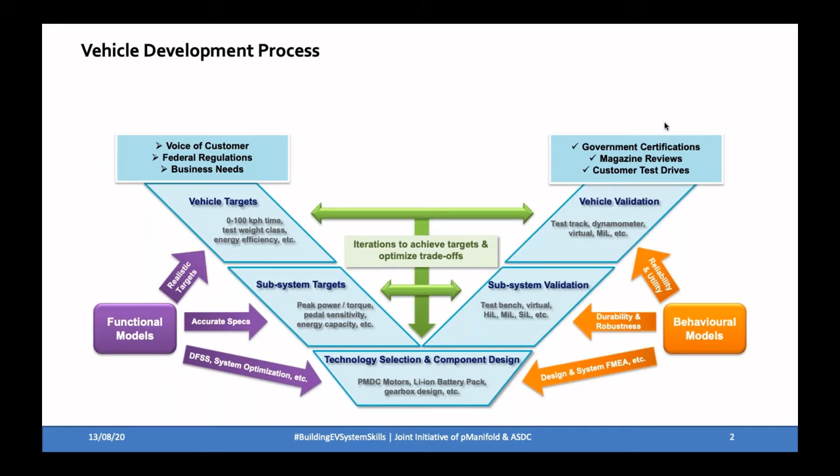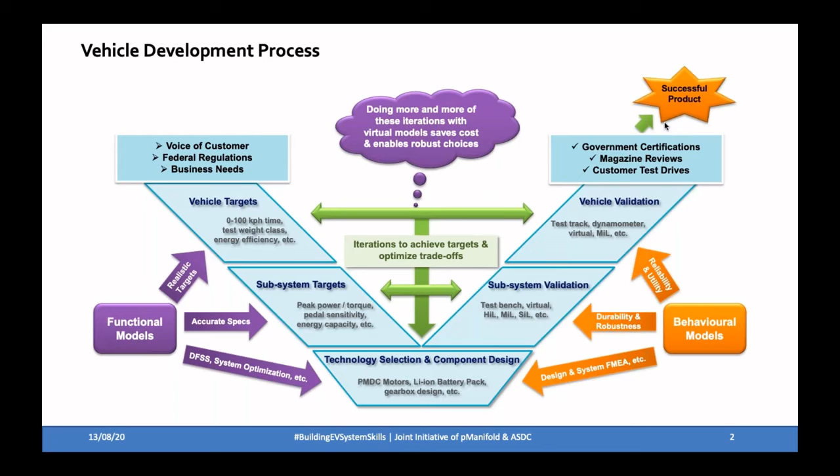And now you can change different inputs, right? You can test your vehicle under different road and driving conditions, under different loading conditions. You can do different driving cycles of the road conditions. You can do different weather patterns to understand how it is impacting your battery performance and what trade-offs there are with the range. So all this combination of tests you will yourself be able to do towards the end of this course.

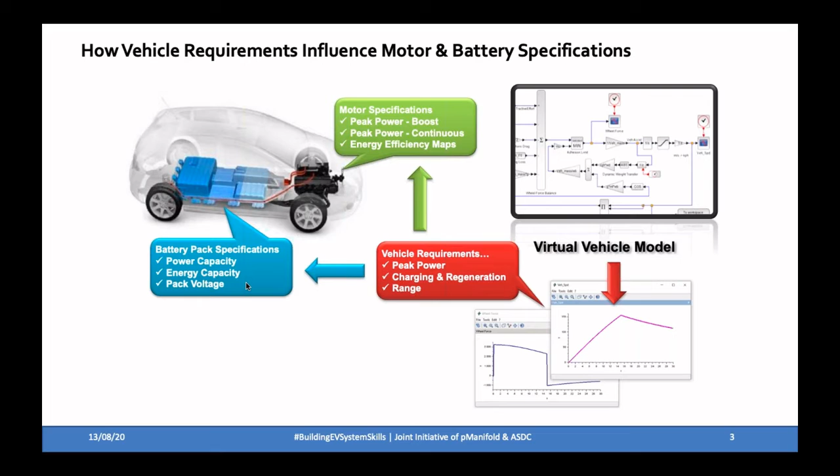Let's take an example of this. Here we are talking of starting with the vehicle requirements, right? Like what an end user wants. He wants good peak power, so he can accelerate the vehicle faster when required. He wants faster charging, and he wants a good range. So these are the typical requirements of a user. And how these requirements translate into motor requirements and specifications, and how they translate to battery pack specifications, is what this course will allow us to ask the right questions about, then build basic models, understand the trade-offs, make appropriate selections, and then integrate all of these things to really test the overall EV performance. Let's understand it a little better with one more example.

Also, to tell you, there are two instructors for this program. The primary instructor will be my colleague and senior partner Vikrant Vaidya. He is unable to make time today. Vikrant has a 20-year background in automotive systems engineering, doing modeling primarily on cars, and he has worked globally with different organizations, on different hybrids and pure electric vehicles. He has designed this particular course understanding the needs of the engineer. He has also been a recruiter for the last 15 years from top colleges globally and in India, and he understands the gaps coming from fresh students, and even the gaps existing with current automotive engineers. So keeping all those practicalities in mind, this course has been designed.

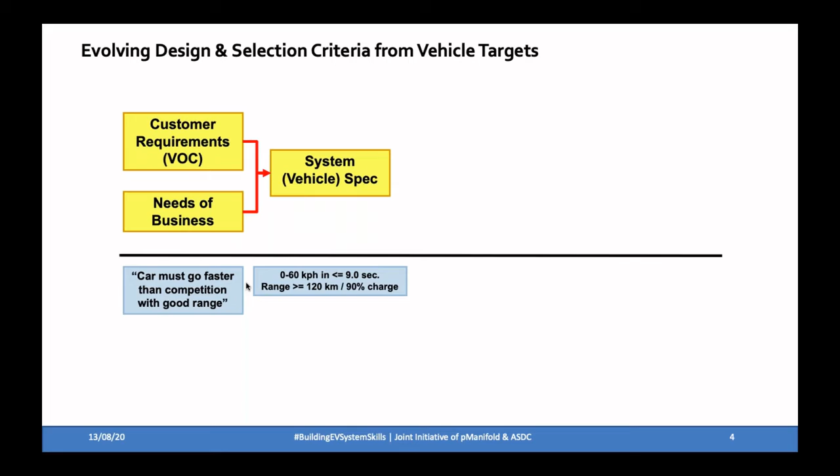So in this particular example, typical requirements start from the customer point of view, and typically a customer, as I said, wants a car going faster, faster than the competition, and with good range, right? You usually start with this definition, and then you further define and quantify it through benchmarks. Let's say you want 0 to 60 kilometers per hour in 9 seconds, and you want a range minimum of 120 kilometers with 10% DOD and 90% charge. So this is the vehicle spec at a very top level that you want your car to be delivering. And then you again benchmark: is there any change that you want?

Like you want to be best in the target segment, better than the target segments. How have you benchmarked? What cost point? What segment are you really targeting with your vehicle? All those choices will really help you make a call on where you want to position your model.

And with this specification, then you need to go into the subsystem specs, right? So the second question will come like, what will be your wheel torque? For you to deliver this speed and range, what would be your wheel torque? What battery capacity should you be looking at?

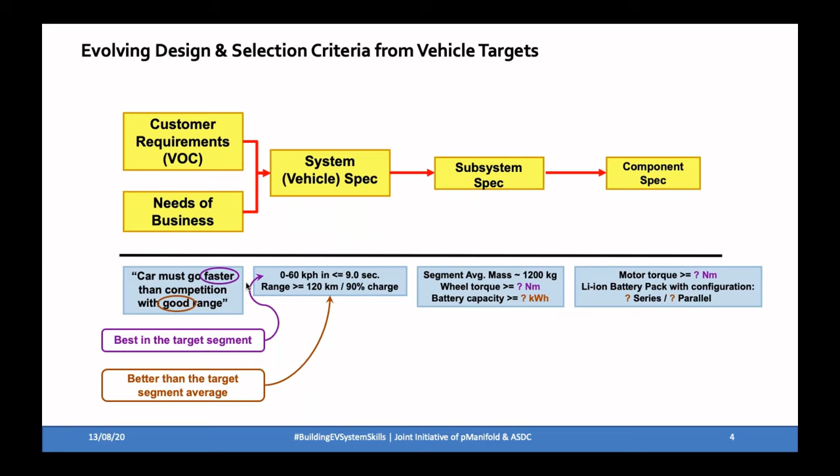And then when you answer that question, the second level further will go into detailing of the motor torques, the gear ratio, how you really fit your pack in the space you have, what kind of series and parallel combinations you will do. So this is one example of how from customer specs we go to the end mile of the component specs. Let's go a little deeper into what you will start learning during this course.

So don't get scared with this model. We will actually help you to really understand different elements of this model. This is a broad vehicle dynamics model, a 1D model. Through the course, you will first build small subsystem models, and towards the end, you will apply those subsystem models to your vehicle model. Then you will be able to do some queries. The whole idea is to physically start understanding these numbers, not just charts.

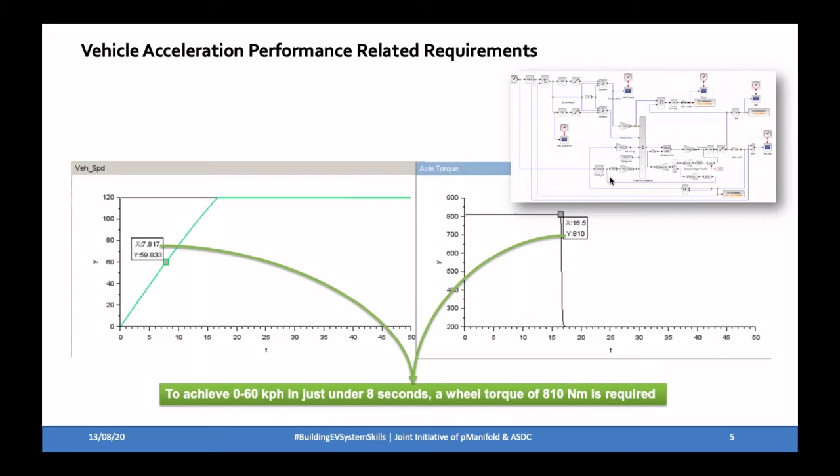So here, after doing this model and some basic analysis, we find out that to achieve 0 to 60 kilometers per hour under 8 seconds, you will need a wheel torque of 810 Newton meters. This gets derived after you have the vehicle model and other parts. Now the second level of question would be, for this wheel torque, what is the range you are looking at? Here we have used the New European Driving Cycle, and under a short cycle that we assumed, we found that you will need a battery capacity of 14.35 kilowatt hours, right?

So again, all this was done using basic engineering functional models, to arrive at: okay, you need to cover this distance with this battery capacity and SOC, and this will be the battery capacity required. This is what you will be able to do and understand yourself for your own application.

The way the course is designed, Monday, Wednesday, and Friday, evening 6 to 7:30 p.m., we will have the theory sessions. When I say theory, there will be a lot of physical and easy explanation of these different subsystems, supported by such models and the understanding behind them, and there will be assignments based on these theory sessions. This is a 5-week course, so for 4 Saturdays we will meet from 2 to 4 p.m., where you will be doing assignments and modeling that you will be oriented and introduced to.

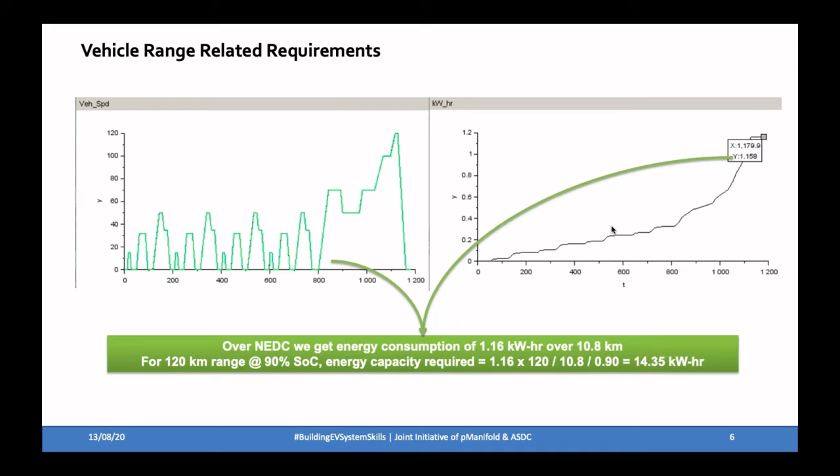And after this first course, we will also offer a much deeper course. The second course, which we are already working on, is battery. In this course you will also learn about battery modeling, but at a functional level. The second deep course on battery will go into much deeper parts of the battery, including electrochemical analysis, how we model, and how we start envisaging some of the challenges in putting up the BMS and its application to EVs.

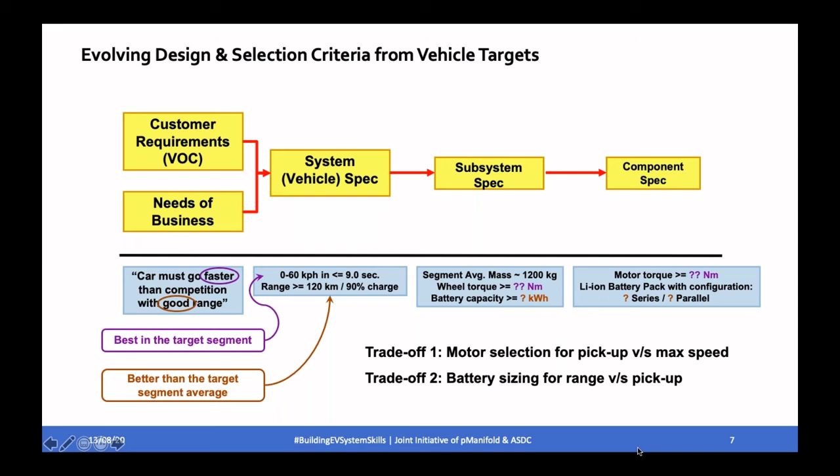So let me complete the same example we started with. We started with the question of what will be the Newton meters, what will be the kWh, and in the last slide we built the answers, and then we start facing some trade-offs. I will discuss these trade-offs. What are the trade-offs?

So the first, when we start picking up the motor, then you have to choose how you have positioned the vehicle and what really you want to do. So for the wheel torque and the gear ratio possible, you have an option of a motor giving this motor torque, 42.8 kilowatts, but then the vehicle maximum speed gets limited to 102 kilometers per hour. On the other side, if you want a higher max speed of 134 kilometers per hour, then you would require a much lower wheel torque, and not the one that we started off with. So this is the trade-off that we'll be doing.

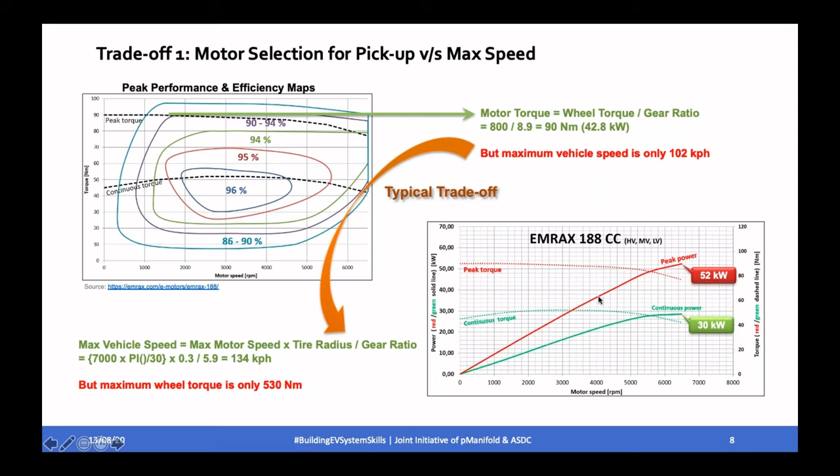Again, these are some of the diagram charts which will form inputs coming from the real characteristics of the motors. We will provide you this. We will also help you understand what it means so that this becomes an input into the models that you will be building together with us.

The second trade-off is now the battery sizing. We already discussed battery sizing earlier, but this is one simple example that we want you to understand, like what combination in series and parallel of a lithium cell you will be able to design the batteries with. So here we have taken two examples, 120 cells in series and 45 in parallel, and this gives you a 50 kWh battery pack. It's a big battery pack for a car, which will give you much higher range, and it also gives you a good peak power, right?

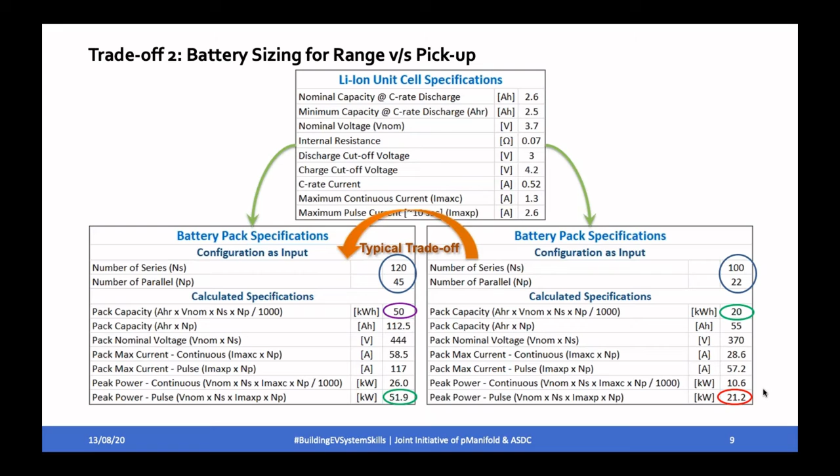So as I said, we'll be using two softwares during this 5 weeks program. One will be Excel. Most participants, we believe, have this software available. And if it's not Microsoft Excel, you can use any open source Excel as well. So Excel will be one tool which we'll be using during this program.

And second is Scilab. Most of the automotive OEMs globally are already using MATLAB and very recently also Scilab. Scilab has all those capabilities as MATLAB. It's an open source free license tool, and that was the reason for selecting it for this program, so that without licensing issues, our participants and learners are able to download this software and work closely with us. So we have built our Scilab models and library to use during this program.

If you are already a MATLAB user, this will be a very similar or simpler transition for you to use Scilab as part of this course. If you have your own reservations and you want to stick with MATLAB, that is also okay. As we said, it's fairly one-to-one modeling, and we can support you if you want to pursue it in MATLAB. But for the others who are using it the first time, we will be using Scilab in the program, and it has a very similar text user interface, and the Simulink in MATLAB is called Xcos here, but again very similar. So this is a very strong and powerful systems engineering tool.

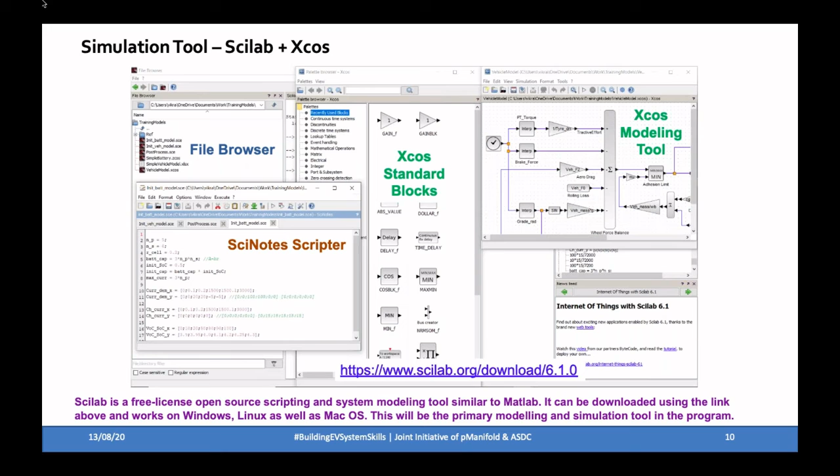And this is the skill that we want you to think through. And what best way if it can be thought through from the very physics, the mathematics part of it, and doing it in a fun form in Excel, Scilab slash MATLAB. So this is what the course will be really focused upon.